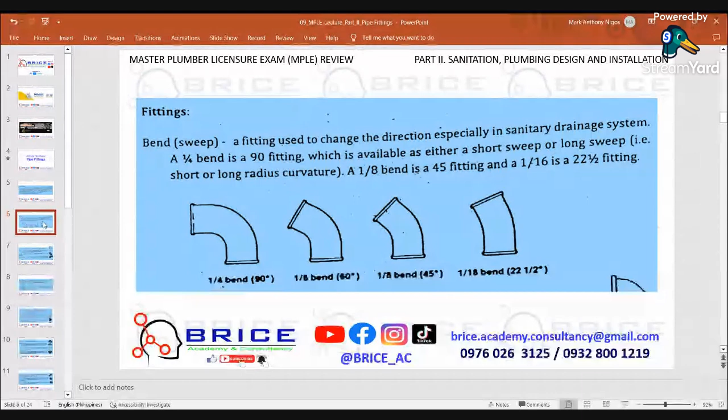A 1/8 bend is a 45 fitting and the 1/16 bend is a 22.5 fitting. This is the example of 1/4 bend. Yan. 90 degree siya. 1/8 bend, 45 degree. Ito naman 1/6 ba ito? 60 degree, and 1/16 na 22.5 degree.

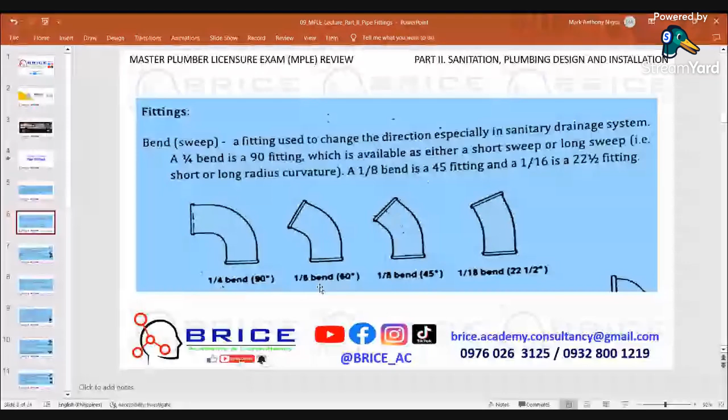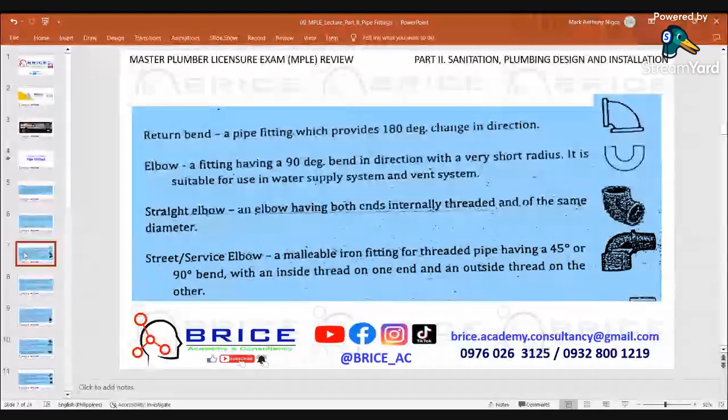Return bend, a fitting which provides 180 degree change in direction. Elbow, fitting having a 90 degree bend in direction with a very short radius, suitable for use in water supply system and vent system. Nagkapalit lang yung picture. This is the return bend, this is the elbow. Straight elbow, an elbow having both ends internally threaded and of the same diameter.

Street or service elbow, a malleable iron fitting for threaded pipe, having a 45 degree or 90 degree bend with an inside thread on one end and an outside thread on the other end. Ito yun. Dito yung isa, inside thread. Ito naman, outer. Yung nasa gilid is the outside thread. Yan, street elbow.

Next fitting is the Y or Y branch. Sometimes they call this V. A Y fitting used to connect branch pipe into a straight run of piping at a 45-degree angle. Ys are available with end connections that are of the same size or with various combinations of reduced pipe size in any directions.

Okay, combination Y branch, single fitting with a combination of Y branch and 1/8 bend. Used in drainage system in changing the direction from horizontal branch to stack or from vertical stack to horizontal house drain or building drain.

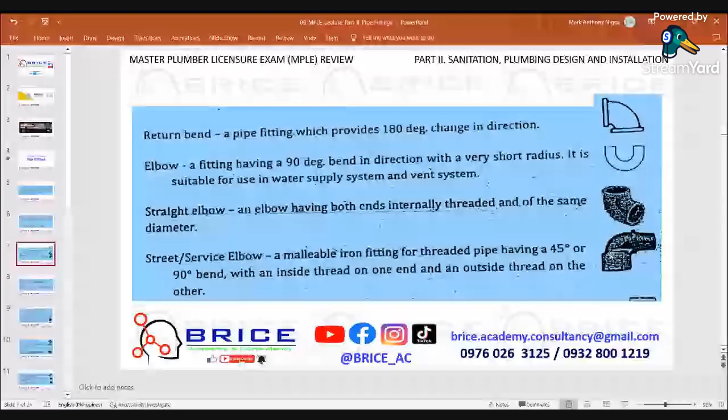Inverted Y combination. Tingnan lang natin konti, baka malakas yung background. Inverted Y combination, a combined fitting composed of 1/8 bend and a Y branch, but the branch inlet is provided with spigot rather than bell.

This is used in lieu of a ventilation system, usually installed at the uppermost portion of the vent stack or main vent. So yan, magkaiba siya, no? Pag naka-inverted yun, yung hub niya dito, tinatawag nila na spigot. Ito naman yan. Ayan, tingnan mo, iba.

No? Tee. The next is tee. Used to connect a branch pipe to a straight run of piping at a right angle. Where flow characteristics are important, such as in the drainage system, code requires that a sanitary tee be used. Straight tee, a tee having all openings the same size. So, magkaiba siya, no?

Though a tee is used to branch pipe into a straight line of piping at a right angle, where flow characteristics are important, such as in drainage, code requires the sanitary tee. So yan, types of tee: straight tee, all openings have the same size. Street tee or service tee.

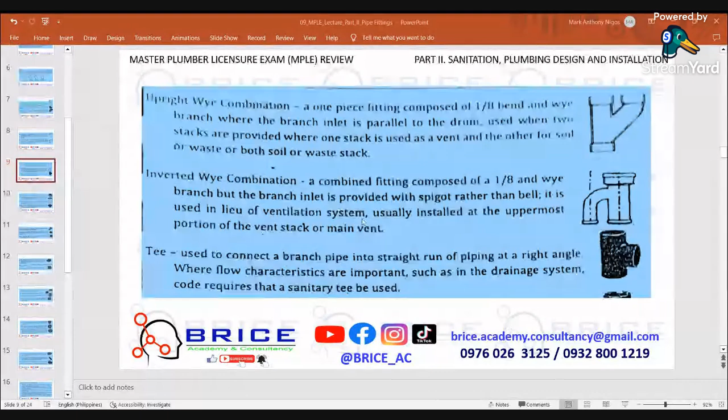Malleable iron fitting for threaded pipe in the form of a tee, having an outside thread on one end and an inside thread on the other end on the branch. Sanitary tee, a tee used as a fitting for soil pipe designed with a slight curve in the 90-degree transition so as to channel flow from the branch line toward the direction of the main flow.

Sanitary cross tee, a type of cross pipe used as a fitting designed with a slight curve in the 90-degree transition so as to channel flow from a branch line toward the direction of the main flow. Yun, sanitary tee. Yan, isa lang yung kanyang transition, no? Then ito naman dalawa. Pag cross tee na, kasi cross nga.

Tapped tee, a bell-end tee which has a branch that is tapped to receive a threaded pipe fitting or a threaded pipe. So, inside thread siya, kaya siya tapped tee. Or tinatawag na bell-end tee, which has a branch that is tapped to receive a threaded pipe fitting or a threaded pipe.

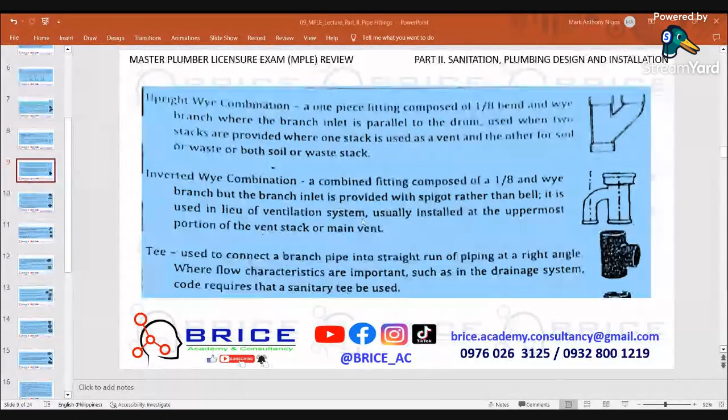Okay lang, check ko lang kung tuloy-tuloy tayo. O, tuloy-tuloy naman ang ating pagre-record.

Next is coupling, a short internally threaded section of pipe used to join two pipes, provided with tiny ridges in the inside surface of the fitting to allow the pipe to seat. Yan, baka magkalito kayo, no, sa coupling, union, union patente, bushing. Ayan, may pagkakaiba yan. Next one is the socket. It has similar application as the coupling, but its ends are enlarged to provide additional mechanical strength. So, mas malaki yung end niya sa socket kaysa sa coupling.

Adapter, a type of fitting to connect pipes of different materials, such as from galvanized steel pipe to plastic or synthetic pipe, galvanized pipe being threaded and the plastic pipe having no threads. Type of transition fitting. Nipple, short length of pipe with external threads at each end used to join couplings or fittings. Coupling, nipple, pati socket. Kita nyo sa itsura pa lang malalaman na.